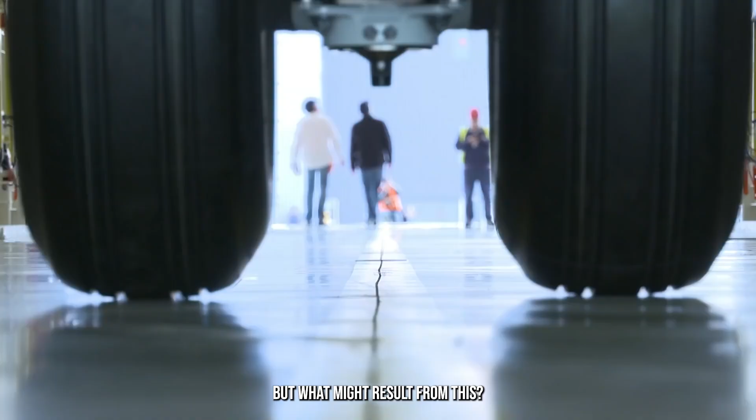Airbus has been making a lot of surprises behind the scenes every year. They have shown great foresight in determining what would best satisfy their customers and incorporating that into each of their products. Their variety aims to satisfy every customer's comfort as they transition from single aisle to twin aisle, and from wide body to narrow body.

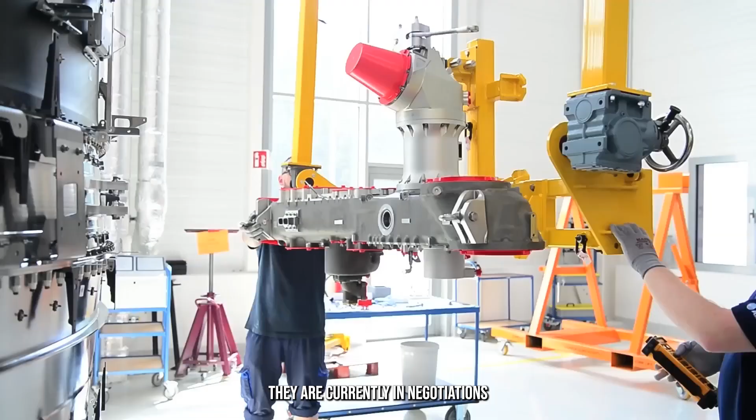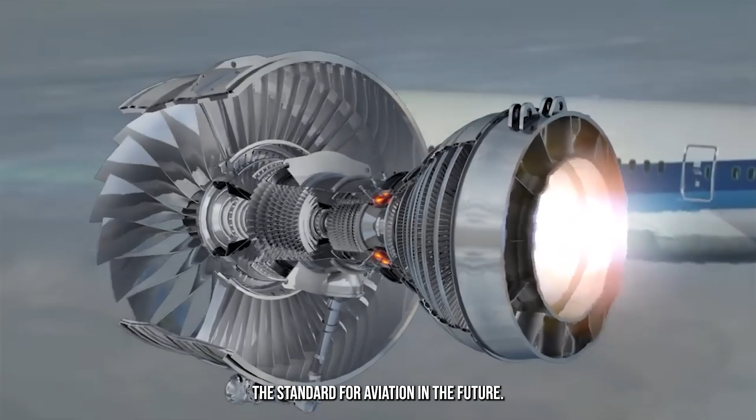They are currently in negotiations with leading engine manufacturer Rolls-Royce to develop designs for an entirely new kind of narrow body aircraft that will establish the standard for aviation in the future. In relation to Rolls-Royce, they intend to construct a scaled-down version of the UltraFan demonstration engine to suit the newest jet models. The CEO of Rolls-Royce, Tufan Erginbilgic, told reporters at the Farnborough Air Show that the goal is to travel light for both passengers and the aircraft. We are currently moving closer to a demonstrator on what I refer to as little engines.

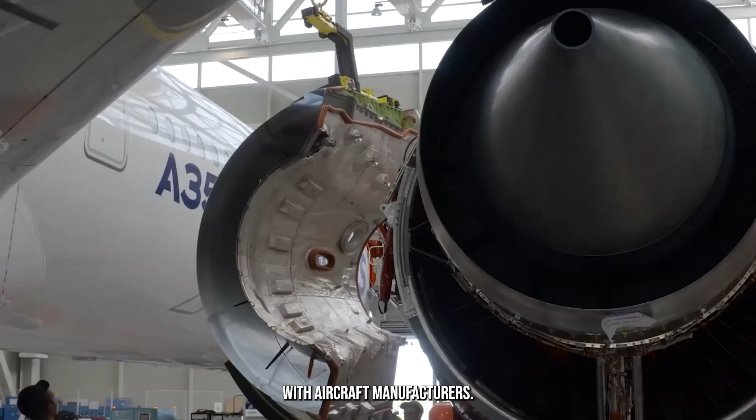At the Paris Air Show last year, he also stated that they are still open to future partnerships in the narrow-body market and that they are now in discussions with aircraft manufacturers regarding this exciting technology. They are becoming sufficiently established in the big engine industry to be able to function without it.

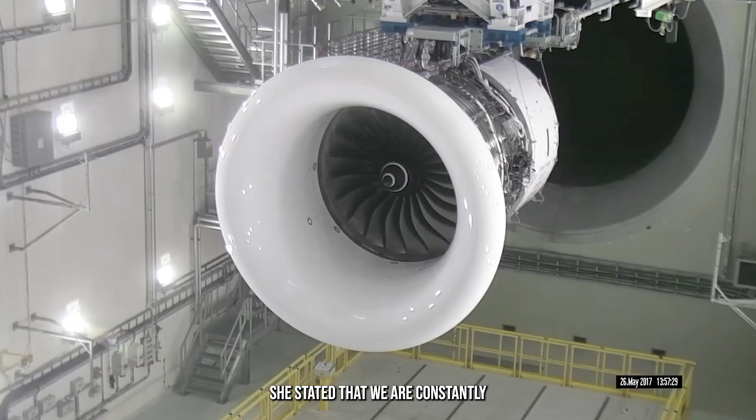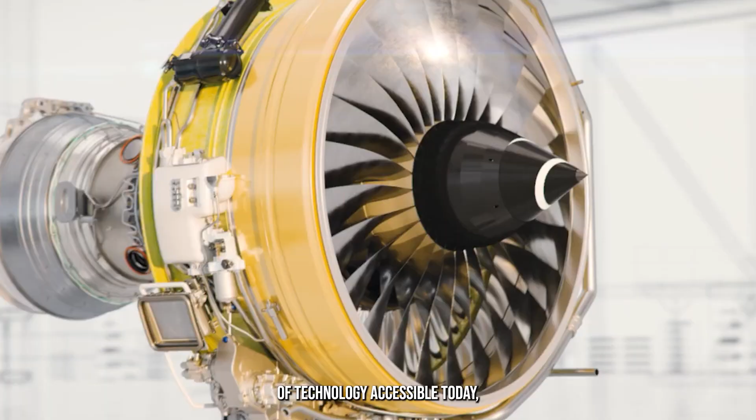At the Farnborough International Air Show 2024, Julie Kitchener, the Chief Sustainability Officer of Airbus, provided further clarification on this. She stated that we are constantly promoting new generation technologies, materials, and engines, because with each new generation of aircraft, we increase fuel efficiency and thereby reduce fuel emissions by about 25%. We have the newest generation of technology accessible today, which is fair enough for us. The future of dependable aircraft is in good hands. It is imperative that we stay one technical step ahead.

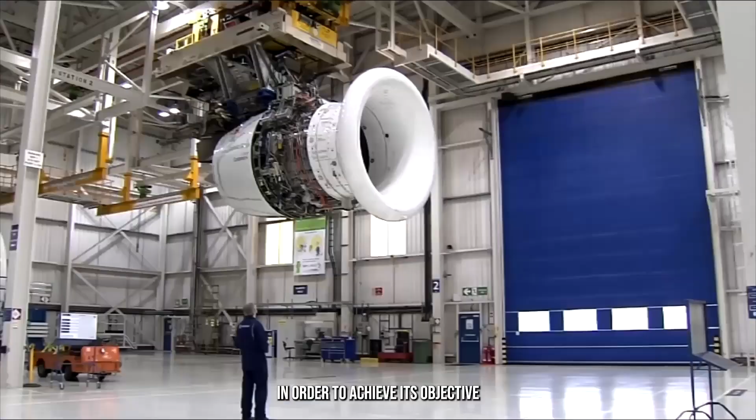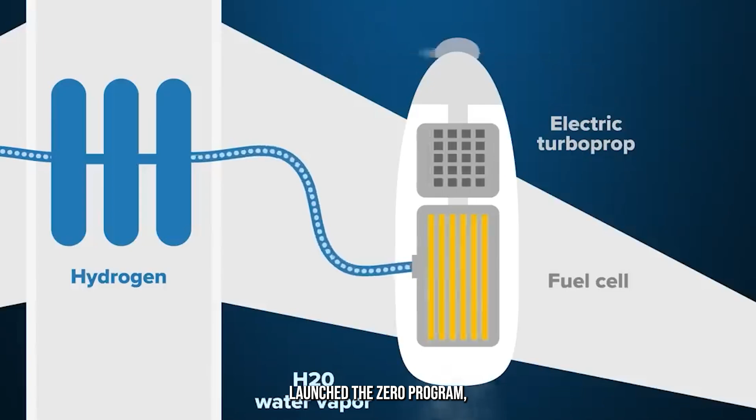In order to achieve its objective of using only sustainable aviation fuel in all of its engines, Airbus is also developing a hydrogen-powered aircraft to supplement the engines. Although it may seem like a huge accomplishment, Airbus recently launched the Zero program, which consists of 4 aircraft prototypes: a fully electric concept, a blended wing body, a turbofan, and a turboprop.

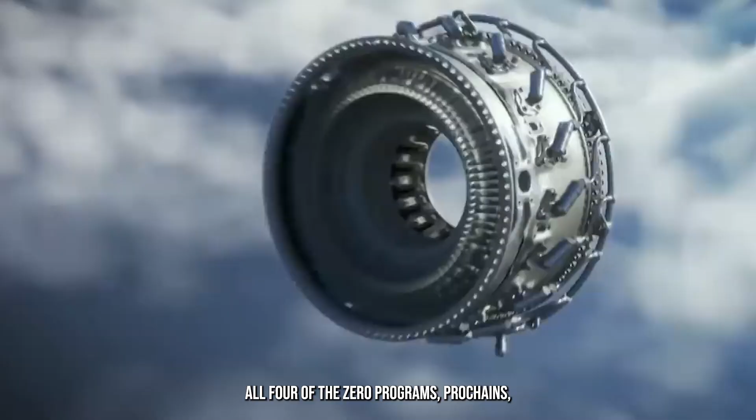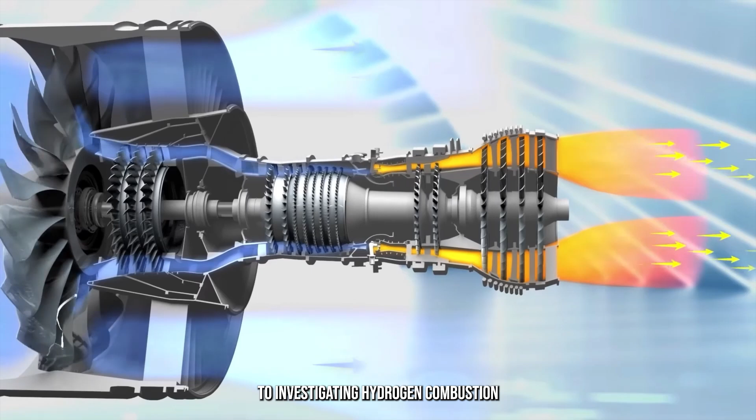The goal is to launch the first hydrogen-powered commercial aircraft in the world by 2035. Since hydrogen will power all 4 of the ZEROe program's prototypes, the business has been conducting a number of ecosystem experiments to make sure it's suitable enough before launching the hydrogen-powered aircraft to realize this vision. In addition to investigating hydrogen combustion and fuel cell technology, Airbus has established various development centers in France, the UK, Germany, and Spain to address tanks and cryogenic fuel systems.

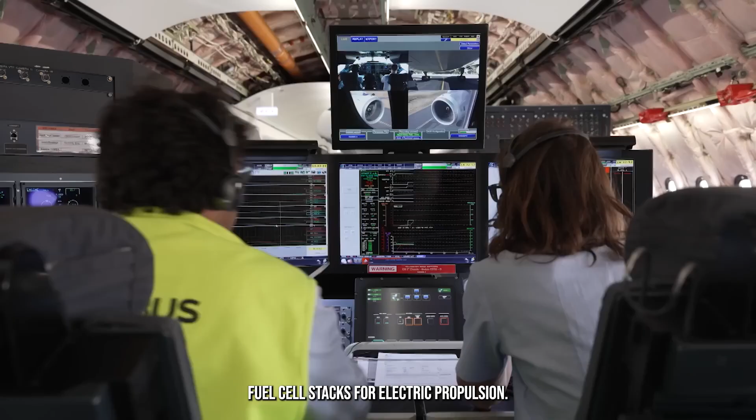The company has teamed up with suppliers to develop hydrogen fuel cell stacks for electric propulsion. The A380 MSN-1 test bed is leading the way in testing these incredible technologies as part of Airbus's efforts to create a carbon-free airplane.

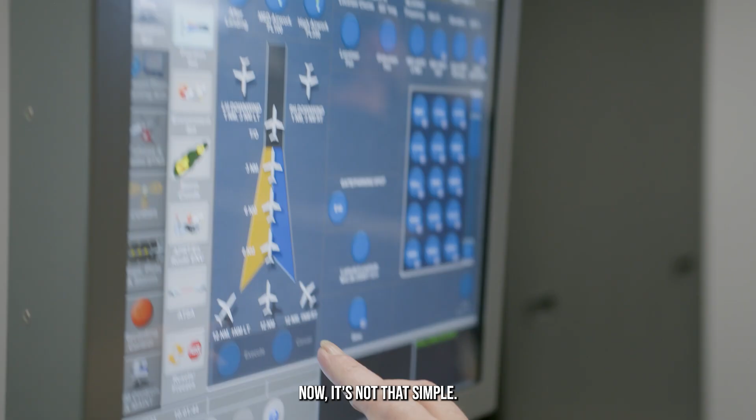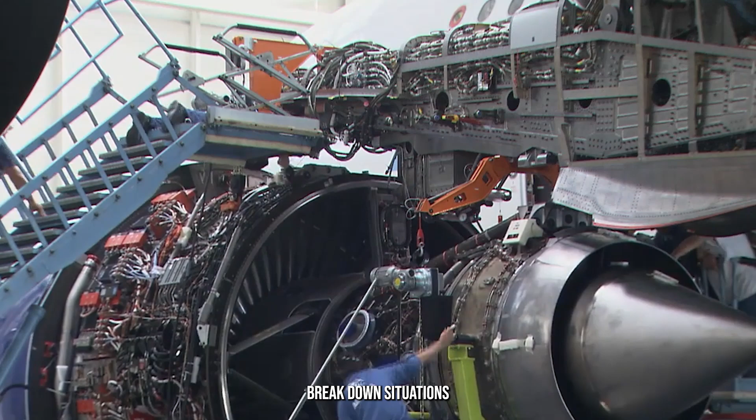Now, it's not that simple. Such cutting-edge innovations necessitate future materials that are strong, lightweight, and economical. Therefore, Airbus is searching for materials that are not only strong, environmentally friendly, but also sustainable, which will drastically save expenses. The business will be able to have fewer breakdown situations and more predictable maintenance. Additionally, it will improve the aircraft's overall performance.

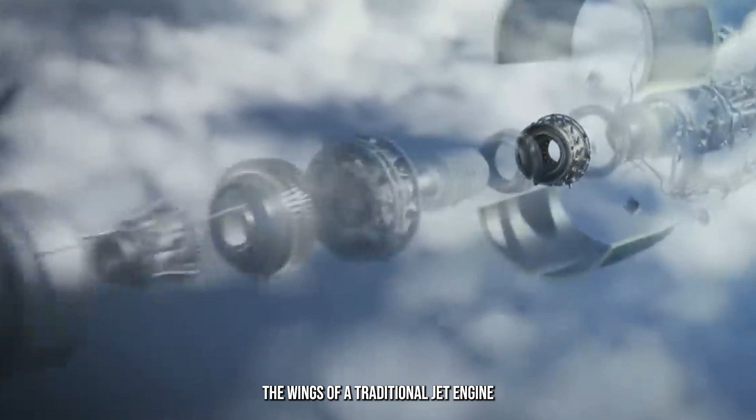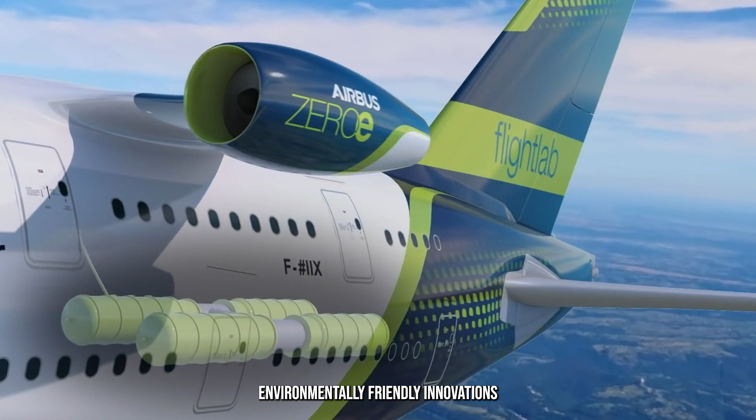There is a lot to say about their new wing design, which embodies the current aesthetic with a fused wing body structure that unifies the wings and fuselage into one shape. A hybrid electric propulsion technology is also incorporated into the ZEROe design. Instead of a traditional jet engine, the wings will have an electric motor driven by hydrogen fuel cells and will house hydrogen tanks, a more effective way to store this extremely combustible fuel. We can conclude that Airbus is headed toward more environmentally friendly innovations that lessen the negative effects of aviation.

You're the true MVP if you're still paying attention at this point.

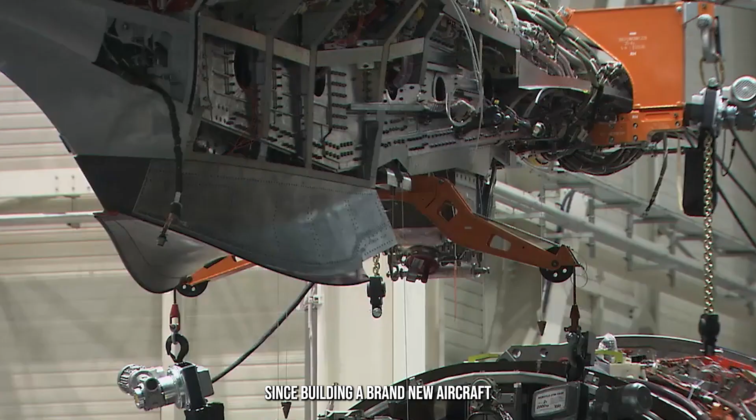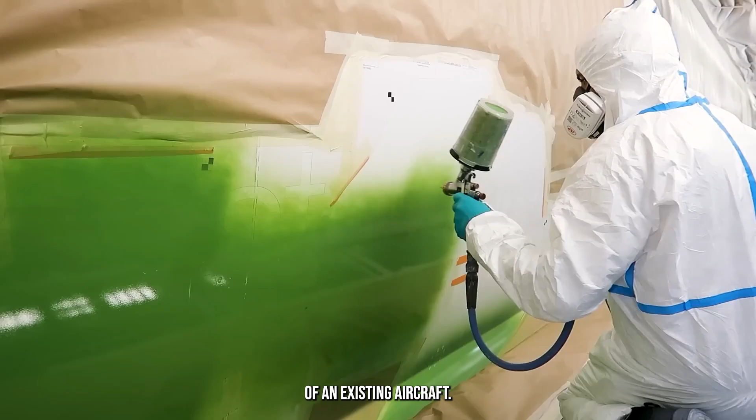Since building a brand new aircraft isn't always as easy as it seems and can occasionally take more than 10 years, Airbus is also thinking of taking the safer route of developing a new version of an existing aircraft, the A350-2000 stretch variant. When it was first launched, many believed it would finally solve the seating capacity problem. It will be an improvement over the A350-1000 and is anticipated to be 4 meters longer with an additional 40 to 50 seats. This alone has the power to force its rivals out of business.

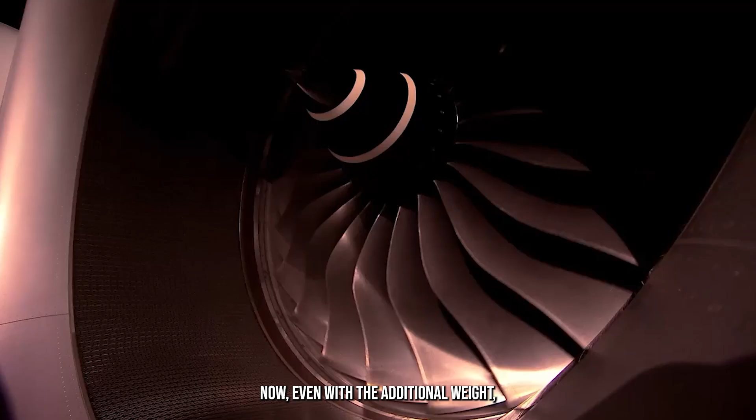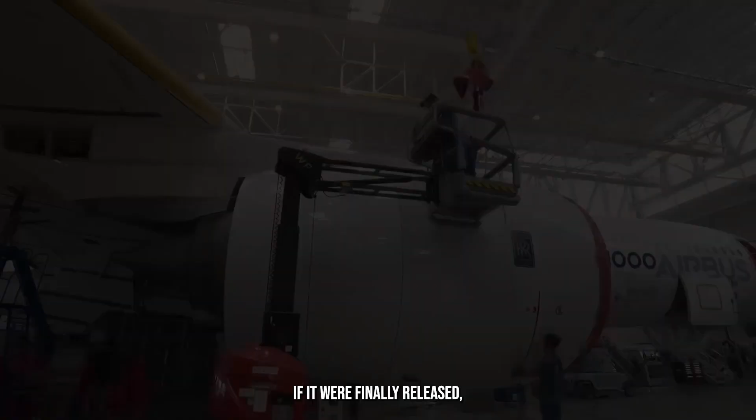Now, even with the additional weight, it wouldn't weigh more than the A350-1000, allowing it to use the same Rolls-Royce engines. Although this is an incredible concept for Airbus and would undoubtedly rank first if it were finally released, there are still questions about its potential.

The size is the first restriction. Even if the A350-2000 is developed, the A380, the largest commercial airplane ever created by man, will still be able to accommodate over 800 passengers. The A350-2000 will be far smaller than the enormous A380, and the A380's market niche is another significant drawback.

It serves populous areas and is built with a huge capacity for long-haul trips between major cities. Even with the stretched version, the A350 will not be able to carry such a large number of passengers on such routes, but if the A350-2000 is well designed, it might establish a niche for itself as a more adaptable and effective substitute for the A380 on longer journeys, but with fewer seats. Therefore, airlines that require a large aircraft but do not desire the A380's extraordinary capacity could benefit.

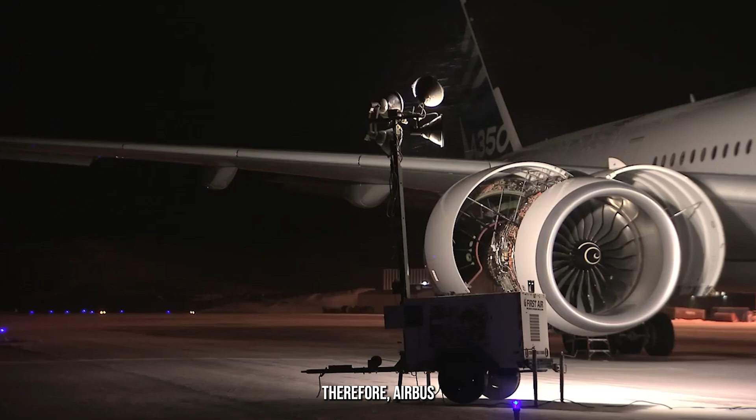Whether the A350-2000 is a good or bad investment will rely on a number of factors, including market demand, technological viability, and financial considerations. Therefore, Airbus is not pursuing the project at this time.

Regarding the current state of affairs, Florent Massou, head of the Airbus wide-body program, made this statement. When considering the replacement of the 777-300ER, we believe that the A350-1000 is sufficiently large, which is in front of us. The A350-1000 is the ideal size, having greater range and superior efficiency.

Thus, the market is expected to grow on this natural platform during the next 3 years. Up to 440 persons can travel on the A350-1000. It can travel up to 15,700 kilometers without requiring a fuel stop, which is more capacity than most airlines require. This ensures that the airplane can fly continuously, practically anywhere in the world.

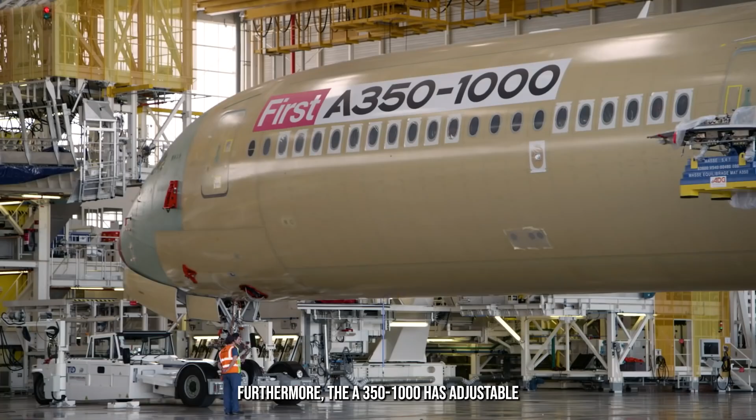Furthermore, the A350-1000 has adjustable seating arrangements that may be changed to suit the needs of the user.